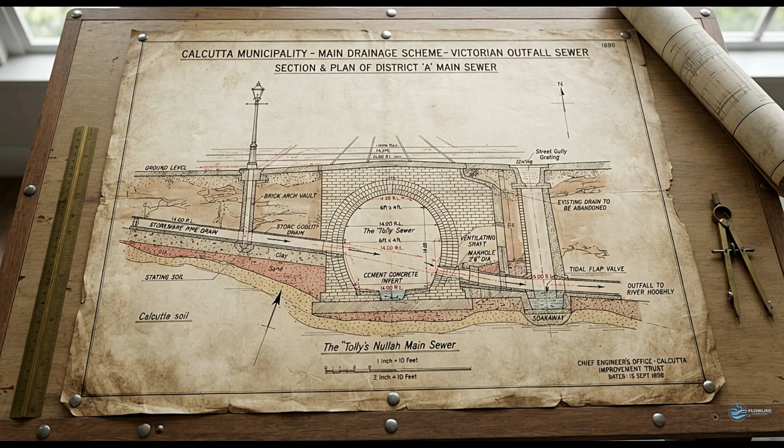But around the world, cities are beginning to think differently. Instead of trying to remove every drop of rainwater as quickly as possible, engineers are asking another question. What if the city itself could absorb water like a sponge?

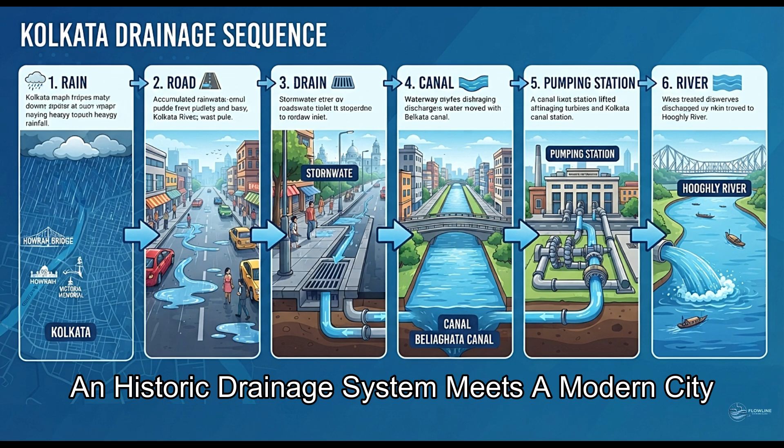Kolkata's drainage history dates back more than a century. The original underground drainage network was designed for the rainfall intensity and urban conditions of its time. Since then, the city has changed dramatically. Roads have widened, buildings have replaced open land, natural ponds have disappeared, concrete and asphalt now cover much of the ground.

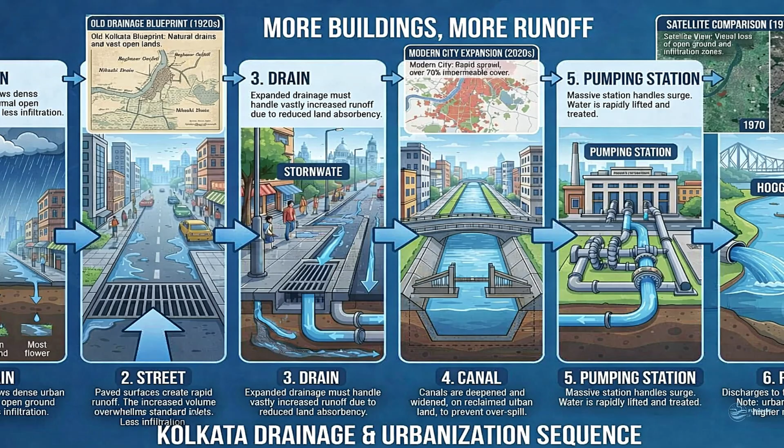During intense rainfall, very little water can infiltrate into the soil. Instead, enormous volumes of stormwater rapidly enter the drainage system. When rainfall exceeds the drainage capacity, water begins to accumulate on roads and in low-lying neighborhoods. This is why waterlogging can occur even without river flooding.

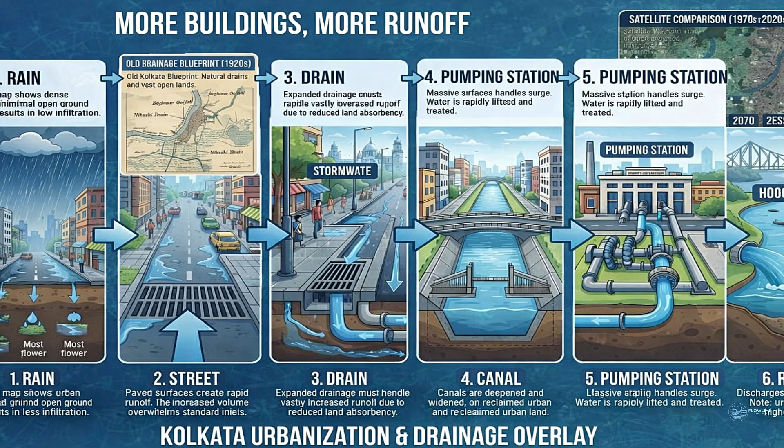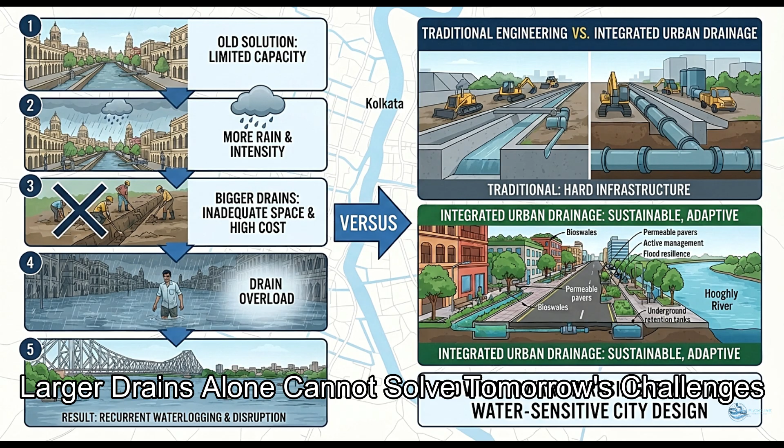The challenge is no longer only drainage. It is urban hydrology. For decades, the engineering response to waterlogging was simple. Build larger drains, install bigger pumps, construct additional canals. These remain important tools. However, modern cities have learned that continuously increasing drain size is not always practical.

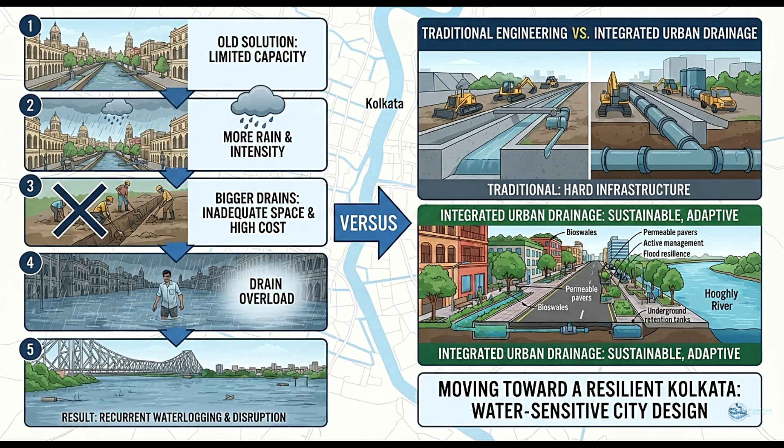Dense urban development leaves limited space for widening underground infrastructure. Construction often disrupts roads, utilities, businesses, and daily life. As rainfall patterns become more intense, relying solely on larger drains becomes increasingly difficult.

The future of urban drainage therefore combines traditional engineering with smarter water management. Instead of moving every drop immediately, cities are learning to temporarily store, slow, infiltrate, and reuse stormwater.

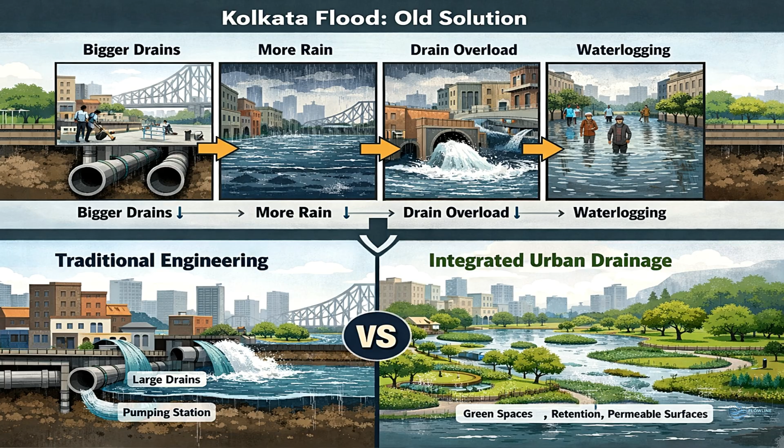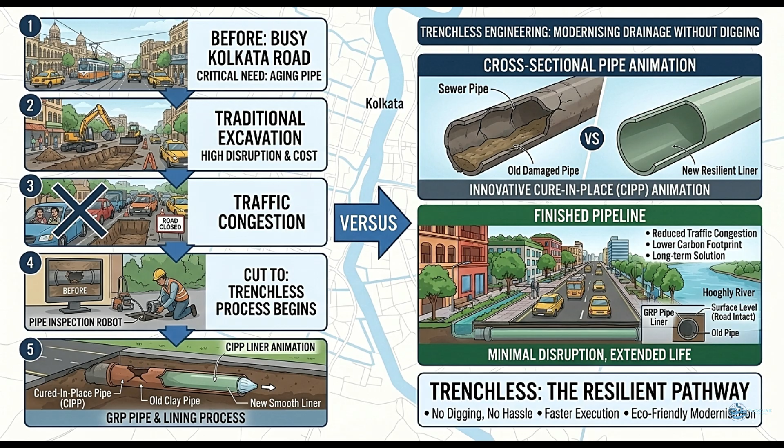Replacing old underground pipelines in a crowded city can be expensive and highly disruptive. Imagine excavating major roads across Kolkata just to replace aging trunk sewers. Fortunately, engineers now have another option. This is known as trenchless technology. Instead of excavating entire roads, damaged underground pipelines can often be rehabilitated from within.

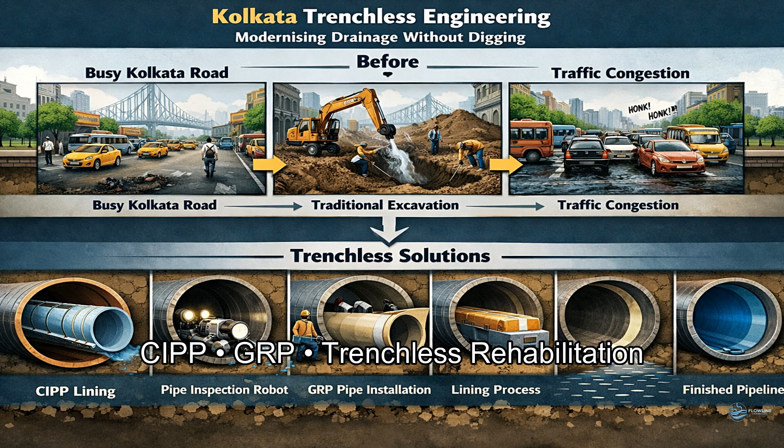Techniques such as cured-in-place pipe, CIPP, create a new structural lining inside an existing pipe. Similarly, glass-reinforced plastic, GRP systems, provide durable and corrosion-resistant solutions for large drainage infrastructure. These technologies reduce traffic disruption, minimize excavation, shorten construction time, and extend the life of critical drainage networks.

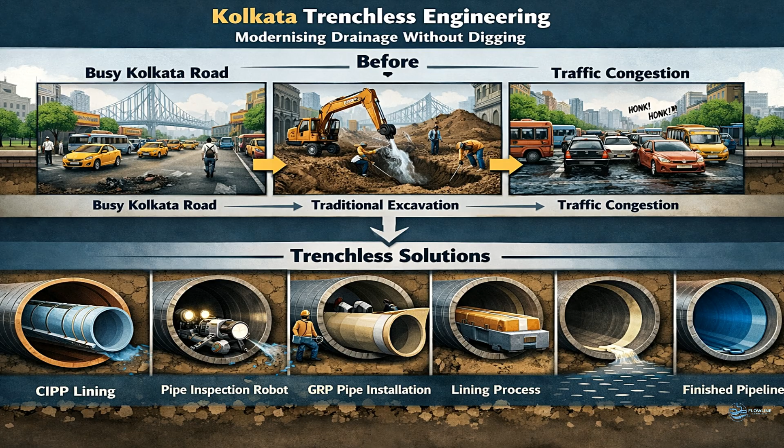For a densely populated city like Kolkata, trenchless rehabilitation represents one of the most practical engineering tools for upgrading aging infrastructure. The sponge city concept began as a new approach to urban water management. Instead of treating rainwater as waste, the city treats it as a valuable resource. The objective is to allow rainwater to remain within the urban landscape for longer periods.

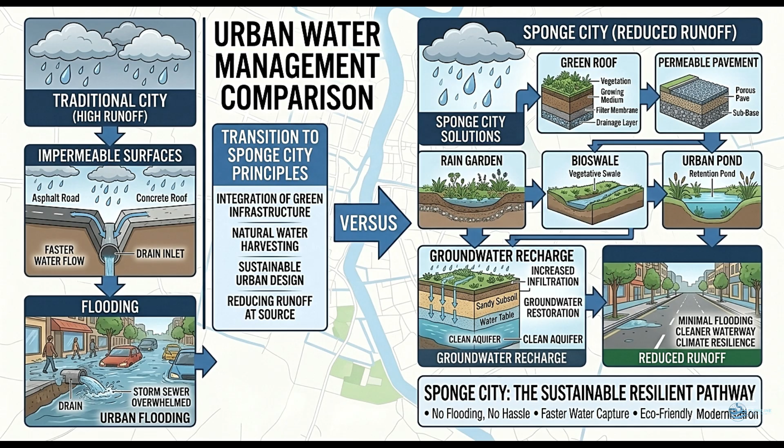This can be achieved through several engineering and landscape measures. Permeable pavements allow water to seep into the ground instead of immediately flowing into drains. Rain gardens and bioswales temporarily collect runoff while filtering pollutants. Urban ponds and retention basins store excess stormwater during heavy rainfall. Green roofs reduce runoff from buildings.

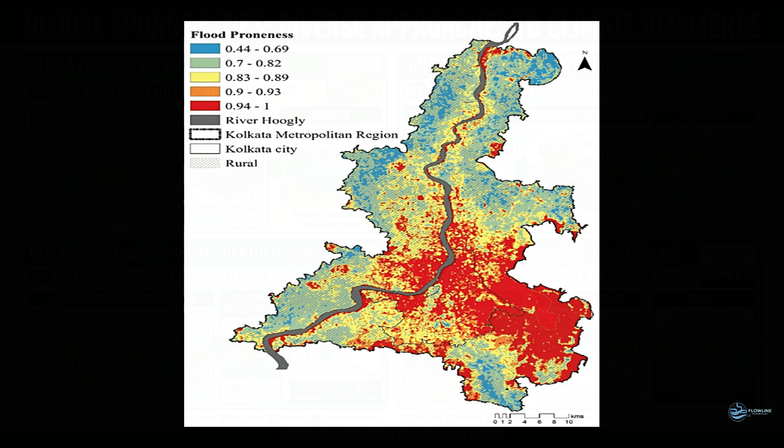Together, these measures reduce peak stormwater flows and lessen the burden on conventional drainage systems. A sponge city does not replace engineering. It strengthens engineering by working with natural hydrological processes. The answer is yes, but it cannot happen overnight.

Kolkata already possesses important natural assets, including the East Kolkata wetlands, which provide ecological support for the city's water system. Future urban planning can gradually integrate additional sponge city features. Redevelopment projects may include permeable surfaces. Public parks can function as temporary stormwater storage areas.

Road reconstruction projects can incorporate bioswales and infiltration trenches. Urban lakes and canals can be restored as active components of flood management. Rather than replacing the existing drainage system, sponge city principles complement and strengthen it.

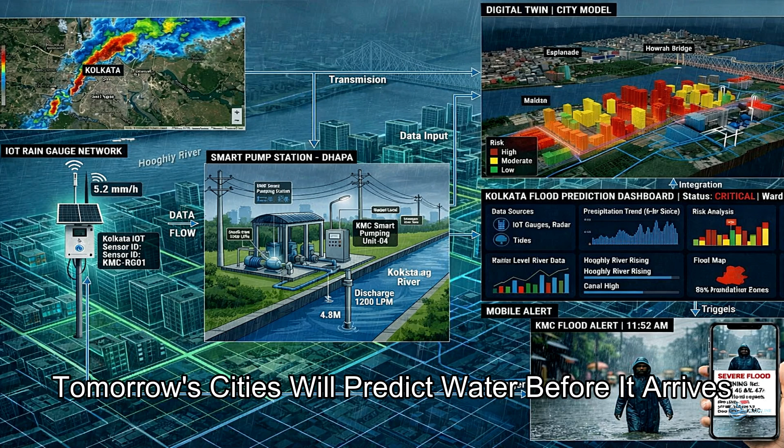Tomorrow's drainage systems will be smarter than today's. Rainfall sensors, real-time pumping station monitoring, digital drainage models, smart control gates, artificial intelligence. These technologies allow engineers to predict waterlogging before it occurs and operate drainage infrastructure more efficiently. The future city will not only react to storms, it will anticipate them.

Kolkata has always lived with water. Its rivers, canals, wetlands, and drainage networks have shaped the city's history. The challenge today is not simply building larger drains. It is rethinking how cities coexist with rainfall. Perhaps the future does not belong to cities that fight water. Perhaps it belongs to cities that learn to live with it.

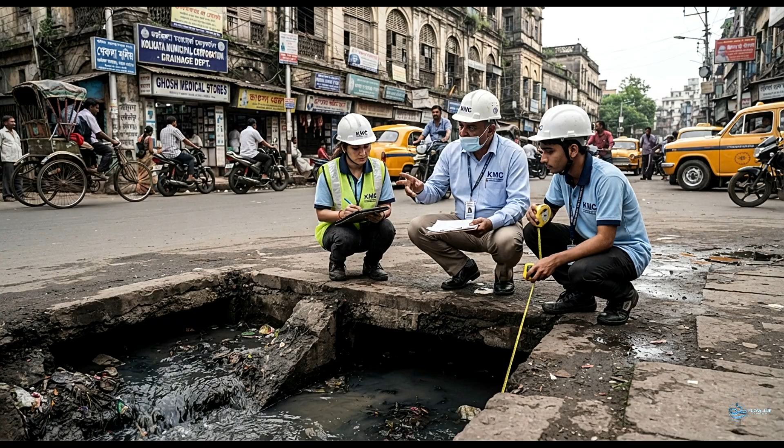A sponge city is not just an engineering concept. It is a new philosophy of urban resilience, where technology, infrastructure, and nature work together to create safer, more sustainable communities. Engineering Earth's Balance, Flowline Chronicles.